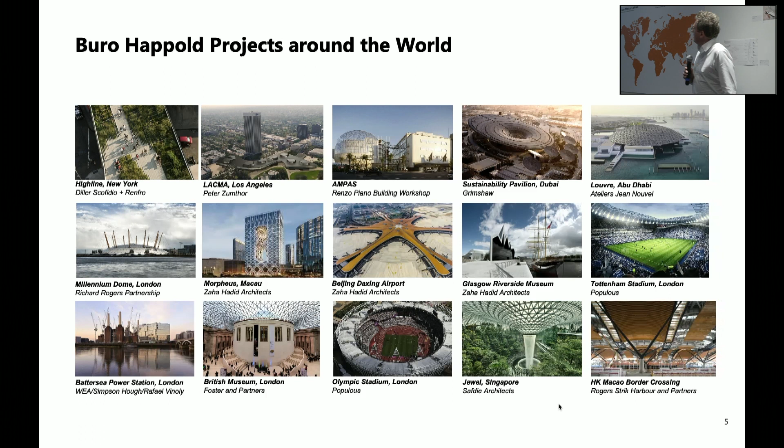The High Line, Beijing Airport, Olympic Stadium, Battersea Power Station, the British Museum, to name a few on that sheet. And some of them are mine. I've worked on those, and I had the great fortune to work with some of the best architects in the world, and on some of the most challenging projects, like lifting the Cutty Sark 3 meters in the air, and Beijing Airport, or this project there, Bee'ah headquarters. I just come from there. I saw the client there yesterday.

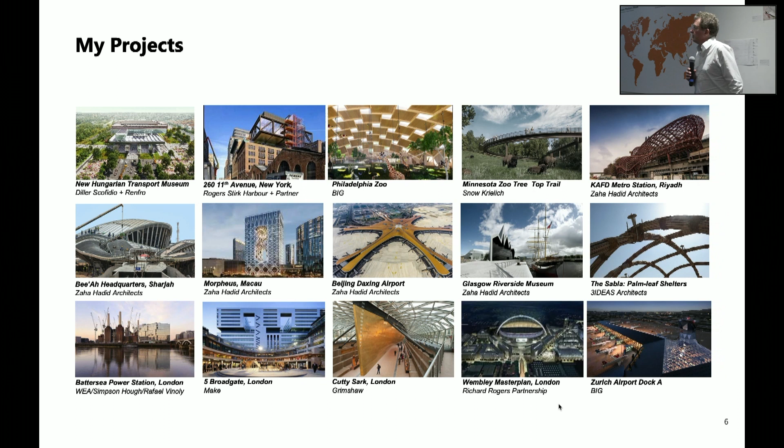And as a company, like we saw earlier in Brigitte's quite thought-provoking talk, there's been a movement over the past, say, 5 years that has brought all the sustainability questions much more to the fore. For us, they've been driving questions for the past 40 or almost 50 years of our existence. They've always been at the forefront of what we're doing. But this push for zero carbon, I would say, started around 2018, 19. Before that, nobody really wanted to know.

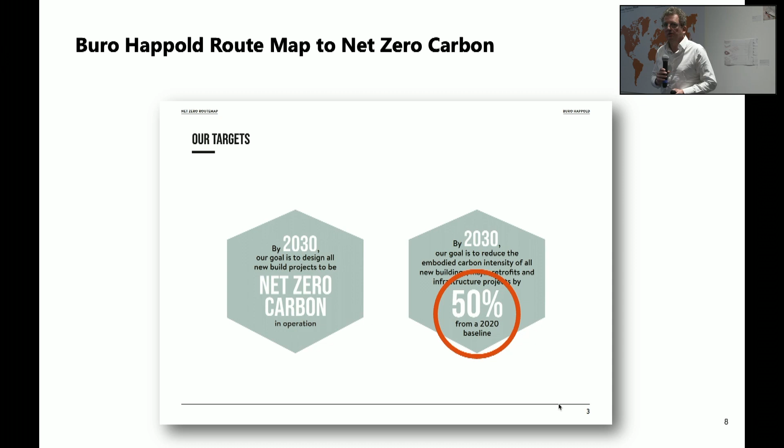And we've enshrined that into our own route map to zero carbon, our sustainability strategy. And here you will see something interesting, because while we are committing to net zero carbon in operation by 2030, we're committing to 50% reduction of embodied carbon, because materials are the problem. They're really the biggest problem.

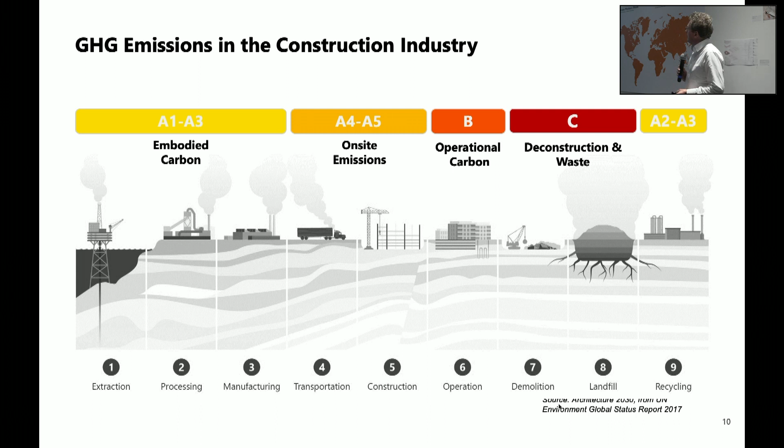Everything we do sits in this extract, build, throw away economy that Brigitte was talking about. And these are the points where we accumulate carbon, embodied carbon or carbon in general, in the construction industry. And we heard the percentages, they vary. I'm a little bit more on the timid side. I say it's 39%, not 41%, but 40% is the number of the contribution

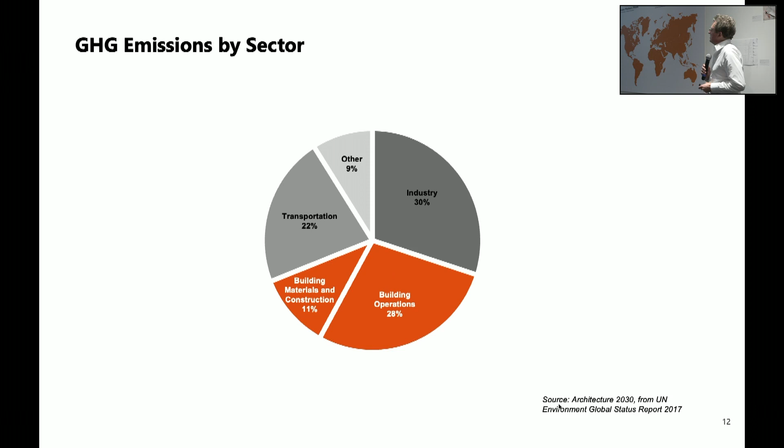of what we as architects and engineers are directly involved with to greenhouse gas, or GHG, emissions. They're measured in CO2 equivalent, but there are other greenhouse gases that play a role in that. So the industry had started talking about greenhouse gas emissions. But if I split this further, this is the real culprit here. Building materials and construction itself is 11% of the total, more than a quarter of our contribution in general.

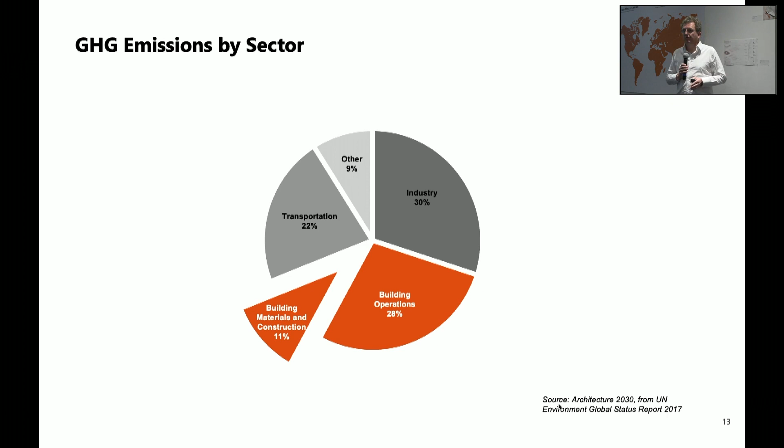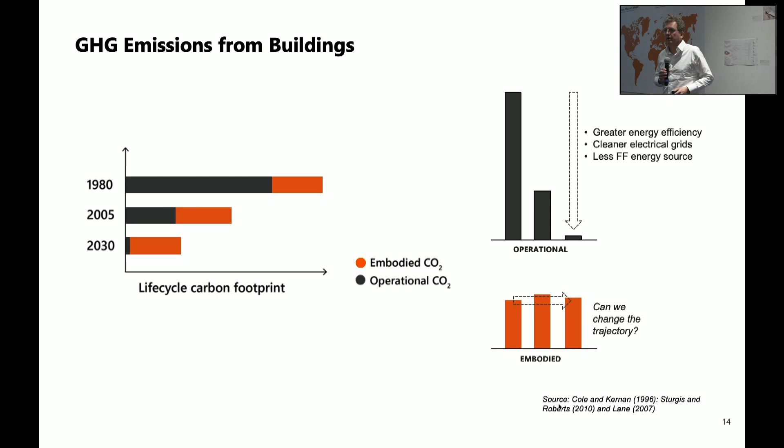Cement and concrete. Here's an interesting one, because cement is the real culprit. I'll come to that in a moment. A kilogram of cement is a kilogram of carbon. If you then mix it into concrete, it becomes a lot less, because concrete is a mix of materials.

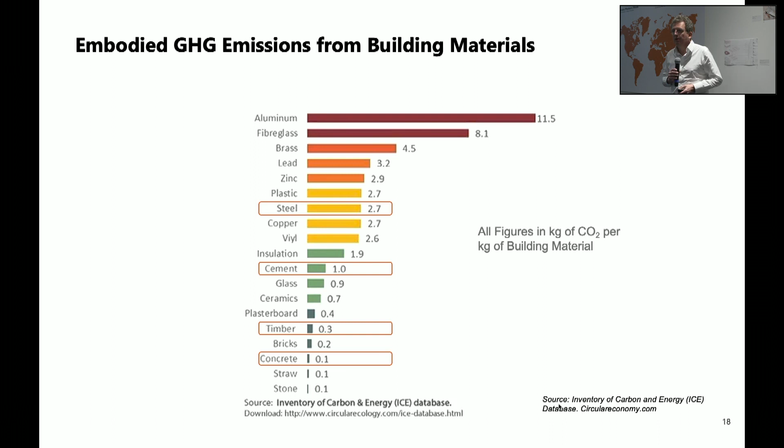And then the third one I want to look at is timber. And timber is often sold as carbon positive or negative. I don't even know which way around you want to look at it. Basically, it's got no carbon footprint, actually good for the environment if you build in timber. I don't quite believe it, and I'll show you why.

I'll bore you a little bit with chemistry, because that's where it all starts. Cement and concrete. Concrete is a mix of cement, water, aggregate, all mixed together, and that then becomes something that hardens because of a chemical process. But in order to get there, you take limestone and clay, you fire it up to 1400 degrees, and you blast the CO2 out of the limestone.

So you cannot make CO2 emissions-free concrete by simply heating it with something magic and renewable that would heat it up to 1400 degrees. That is the other problem. No renewable energy actually at the moment is able to bring you up to these kind of levels of heat. Any kind of electrical heating coil would just melt at that point. So you have to blast hot air into this thing, and out comes CO2. That's the biggest problem here.

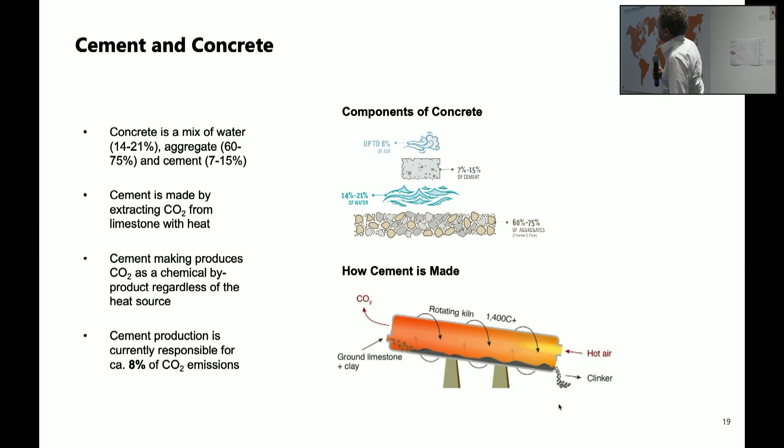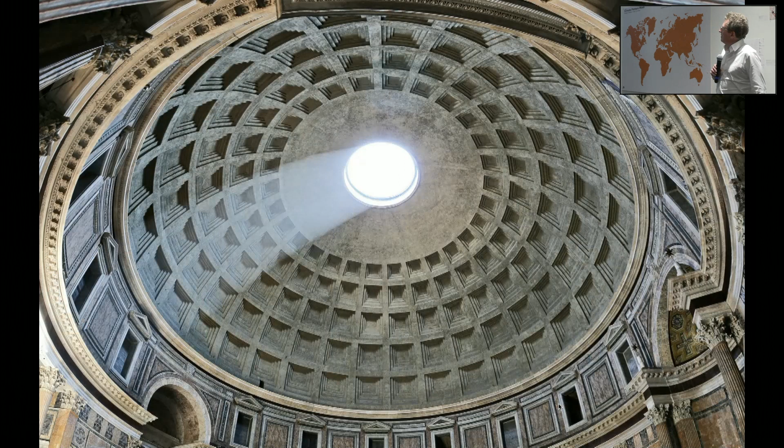And if you add it all up, concrete is responsible for about 8% of global carbon emissions. That's more than twice aviation, similar to only one other material. I'll get to that. But concrete's been the sort of wonder material, right? It starts way back in Roman times. The dome above the Pantheon is actually made from a concrete, a cement-type material. And it sort of got us hooked, basically, because we can do things that are beyond anything, right?

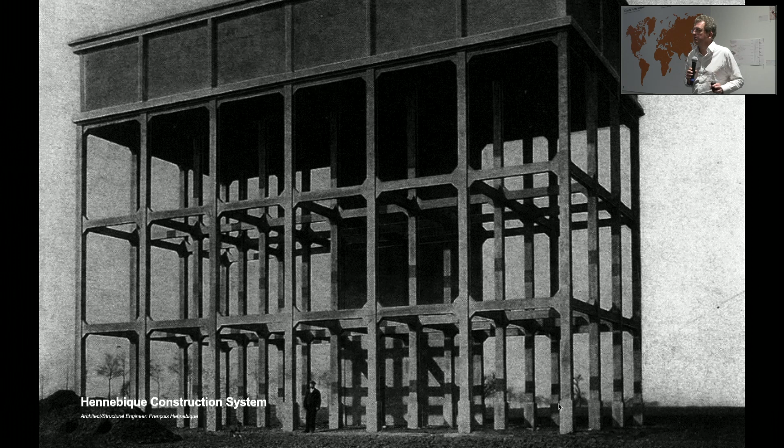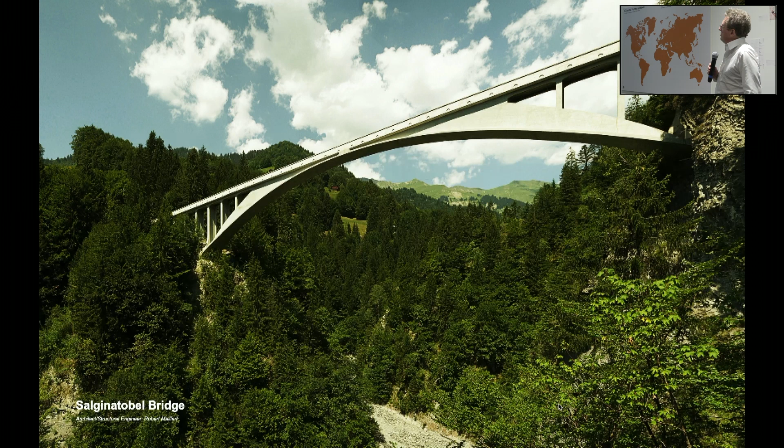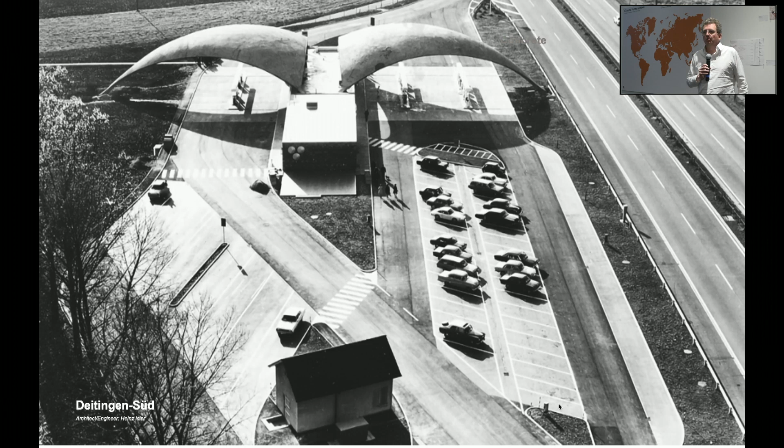Hennebique's structural systems from the 1880s then started turning concrete into a structural material, initially sort of tectonically, maybe a little bit like your standard metal or timber structure, but it's really these kind of long span structures, Maillart's Salginatobel Bridge, or the shells that Heinz Isler built that make concrete into this sort of wonder material, a material that can be formed, that can be an architect's dream, basically. It doesn't always move. Or this one.

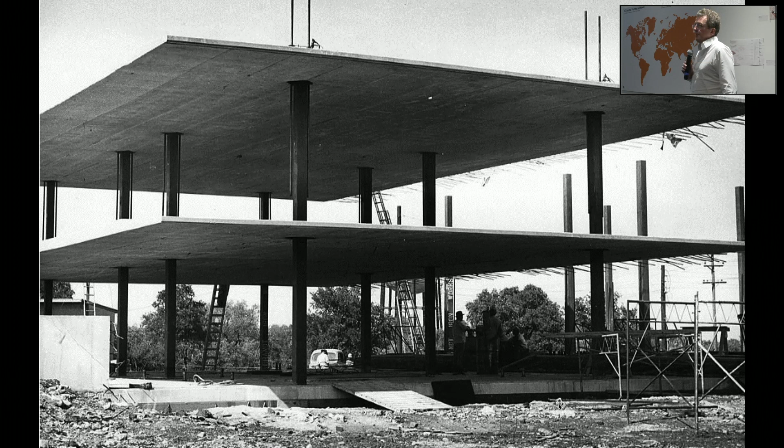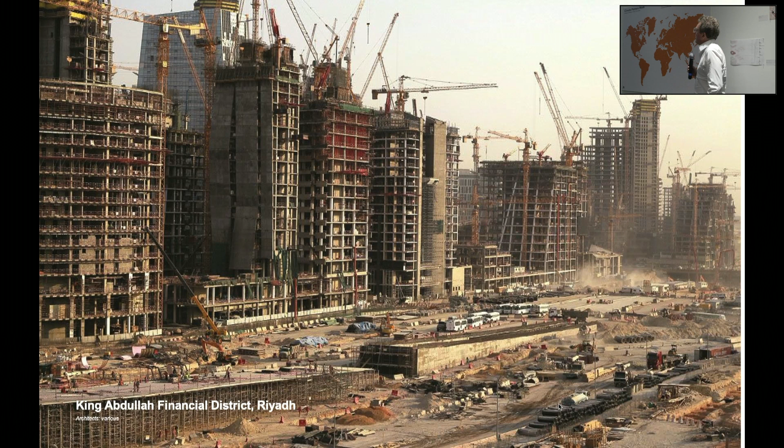But ultimately, what makes concrete so versatile is that you can build what you see here on this rather weird picture, but it shows so nicely the flat slab, right? You can just stack floors, and that's what it looks like in the end. We blast this out. This is KAFD in Riyadh, the King Abdullah Financial District. Hundreds of towers built within the space of 5 years in an area where there was nothing. But concrete is cheap because it's made out of limestone. The whole of Saudi Arabia is limestone. All you need to do is fire it up and turn it into cement.

Similar story with iron and steel. In order to get iron made out of ferrous oxide, you have to blast the oxygen out of the ferrous oxide. And that's a chemical process, and the best way to do that is with carbon monoxide. So you take carbon monoxide, you blast it through a blast furnace, and out comes CO2, and the bottom drops out raw iron. That then needs to be turned into steel. That's another process that uses huge amounts of heat.

And in the end, that part of the industry is an equal 8% of total carbon emissions. So an equal offender to cement, slightly easier to go about the reduction of iron and make that out of hydrogen, only that we don't have hydrogen at this moment in time that is fully made out of renewable sources. If you then take the hydrogen that's split out of the methane, then you're actually worse off than doing it with coke. And I'm sorry, this is where the chemistry lesson ends.

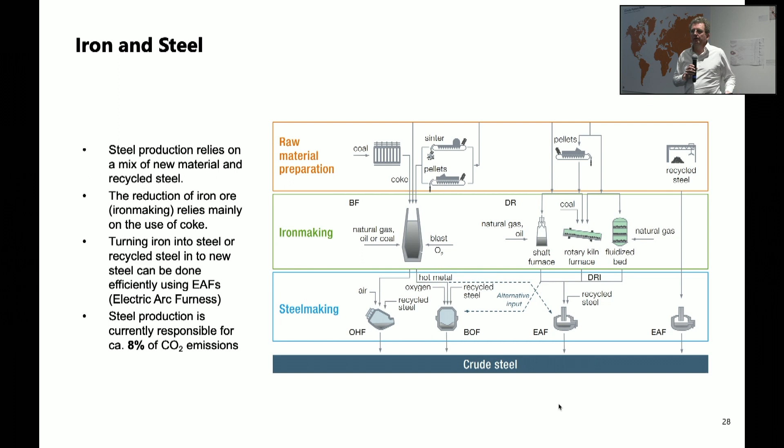But I think we need to go through this because I hear it ever so often that if we just made concrete or cement with renewable energy, then the problem would go away. No, it doesn't.

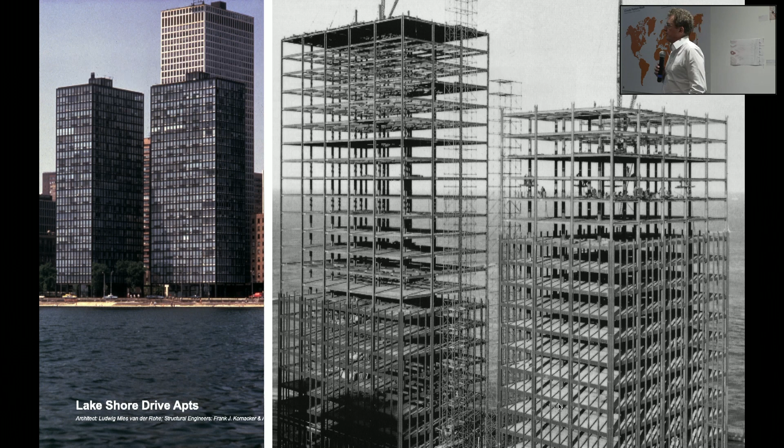Or then later, again, the desire to stack floors. This is probably environmentally the worst building in the world and still one of my favorites. Lake Shore Drive Apartments, Mies van der Rohe in Chicago. Apparently it freezes in winter and you boil in summer. So all singly glazed, but anyway, different story.

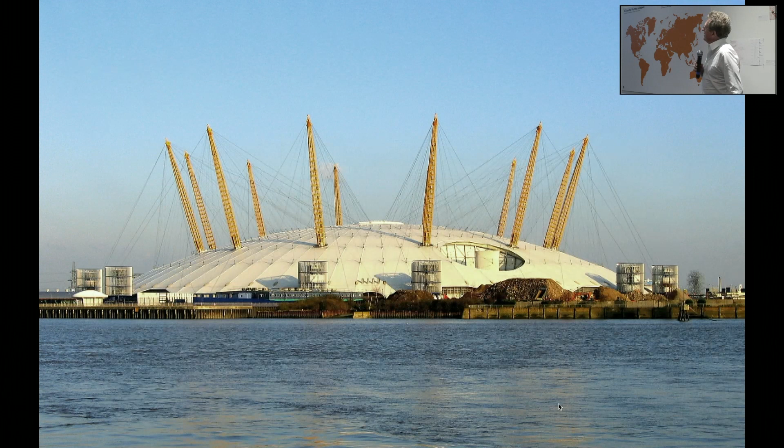But we could then drive this material again to completely new typologies. The Millennium Dome structure that we built in 2000 kind of shows that. Strangely, the air it contains is heavier than the material it has, but it's still a lot of steel, and without steel it wouldn't be possible.

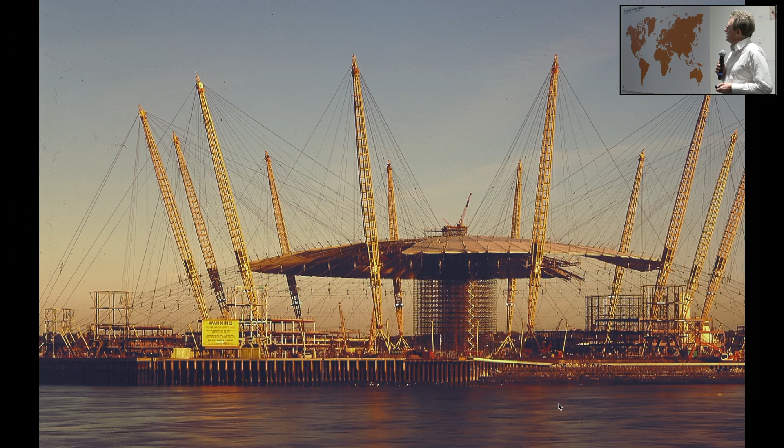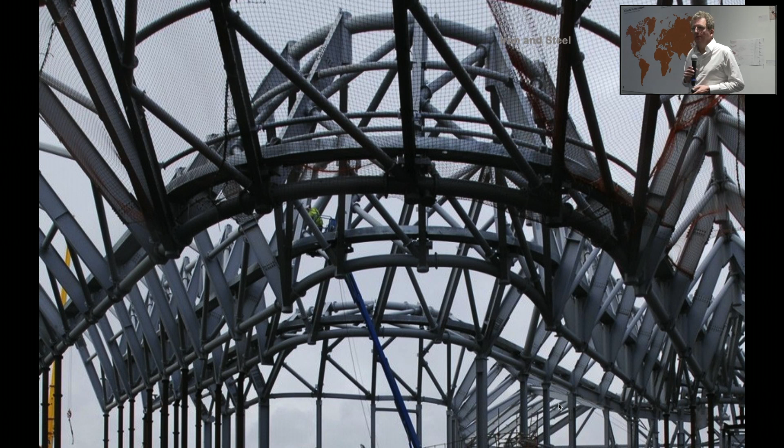This one here, slightly different approach, one of mine, the Glasgow Riverside Museum. I think we used quite a bit of steel in order to achieve that shape and cheat gravity and show that engineering can support a very capricious architecture, if I may put it this way. I've worked many years with Zaha, and it was always a real challenge and real fun. But if I think about it in retrospect, it comes at a bit of a cost, possibly.

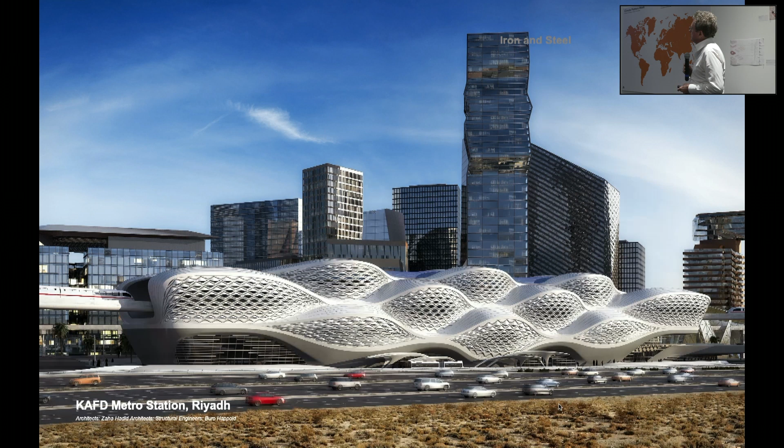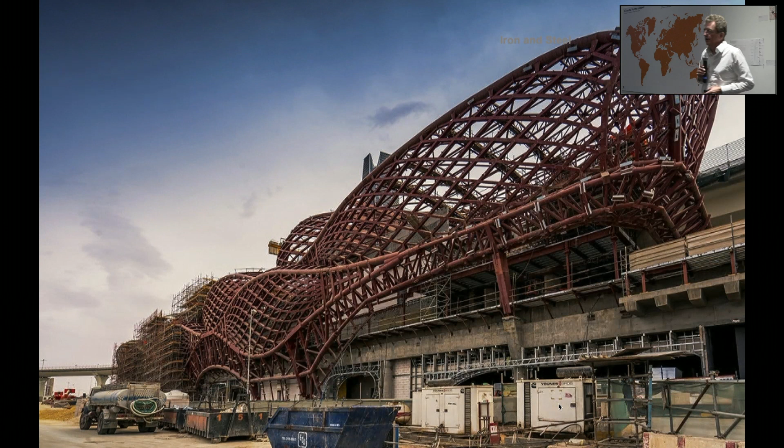This is probably the most extreme of them all. Again, a Zaha project, you may have seen this, it's just about getting ready. This is the metro station for all these towers that I showed you earlier. And that thing on the outside that looks as if it's made out of concrete, it isn't actually concrete. It's just clad in concrete. It's steel, and a lot of it.

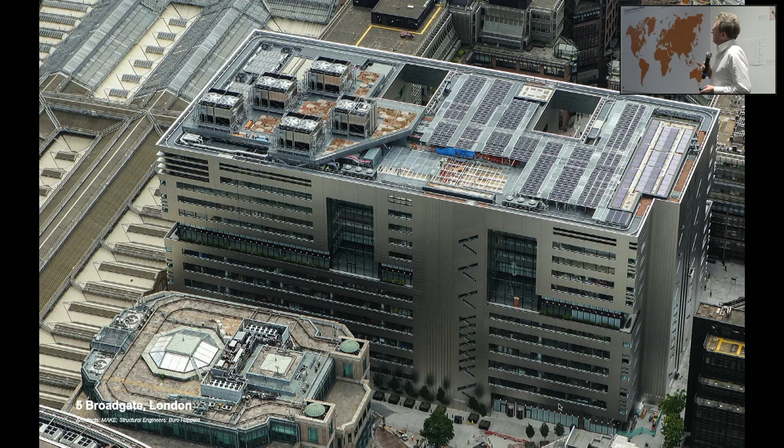So steel is incredibly versatile for a structural engineer to do whatever with it. It's a beautiful material in that sense, but this is sort of peak steel sculpture, I would say. And again, it comes back to actually just stacking floors, as I said. This is a project that I did years ago in the City. Massive banking facility. Just floors one on top of each other.

And the reason why I show you that is because at the time, in 2012, we did a life cycle carbon assessment and used our engineering to take some carbon out, reduce it in some areas. But you see that number up there, 88,000 tons of carbon in this building, which equates to roughly 840 kilograms per square meter. That's a lot.

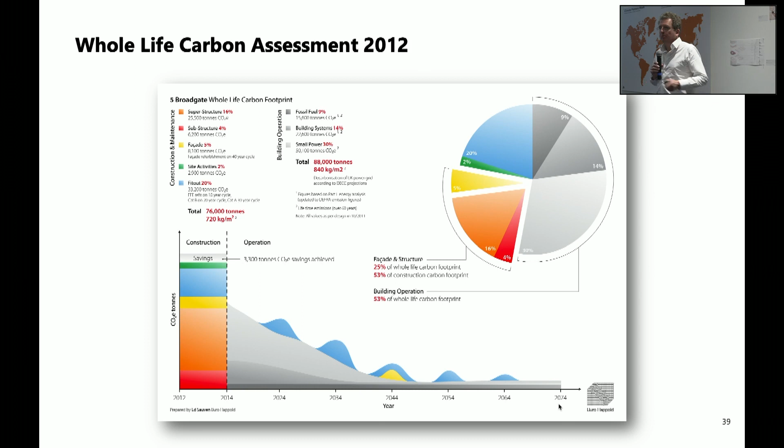Interesting also, when we did this, British Land paid us to do this study. And after the project was over, I went to the sustainability director at British Land and told her that we should do this on all buildings. And she said, no, this was a one-off, no one's really interested in embodied carbon. That was in 2012, right? She's no longer at British Land, and she will probably eat her hat or something. But it has become something incredibly important. We do these life cycle assessments now on every building.

The third material I wanted to look into is timber. And I told you, timber isn't that sort of wonder material that we are made to believe it is, because it actually starts off as trees, but then it goes through a massive industrial process from kiln drying to glue laminating to transport and all the rest of it. It is an engineered product. It is not necessarily a natural product anymore when it comes to our construction site.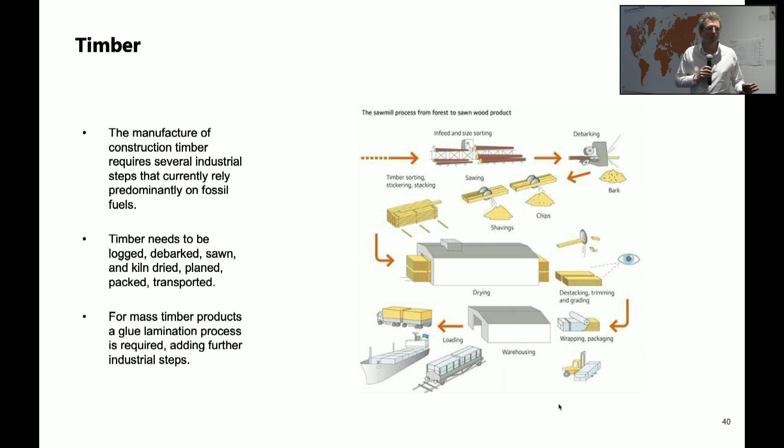So there is processing, an embodied carbon in that whole way of how we deal with it, and a lot of chemicals involved in that. I'm not saying it's a bad material, but it isn't carbon zero. We try to get as close as possible to carbon zero. We've used that a few times in examples, Mike, right?

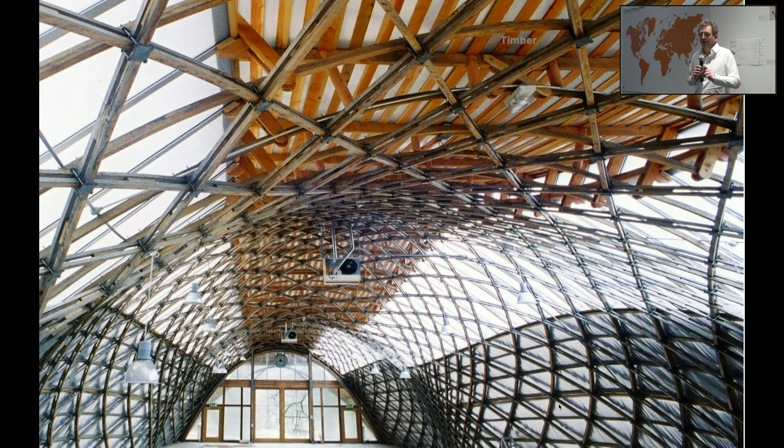And I went to Stuttgart, to Achim's AAG conference. I gave a keynote there, and the three people before me were doing timber grid shells. Would you believe it? I said, look, guys, go back to the 1980s and 90s. We've done them excessively.

This is as close as you can get to natural material timber, because it is green timber. It is not glue laminated. It's just cut slats. It's not kiln dried, deliberately not, because you actually use it in its bendable form. You bend it into shape and make it into the form it then dries into, in fact.

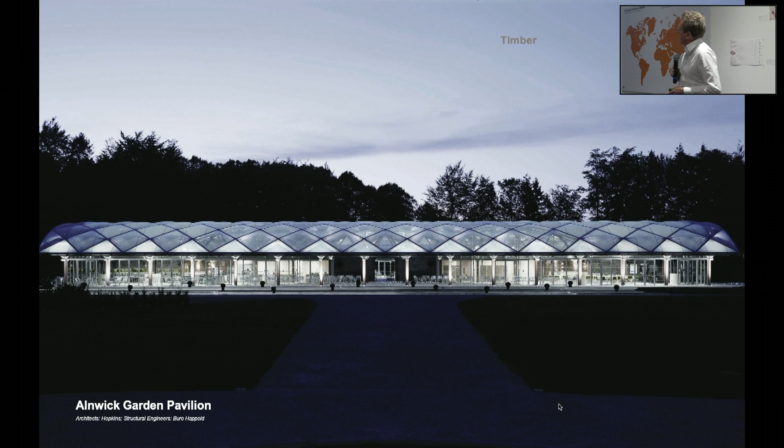But most often, another one of our projects, rather beautiful, but here you get it, the idea that timber is effectively an engineered material. We have metal connectors wherever we piece the individual parts together, and it becomes a hybrid of metal, glue laminated timber, very far away from the natural product.

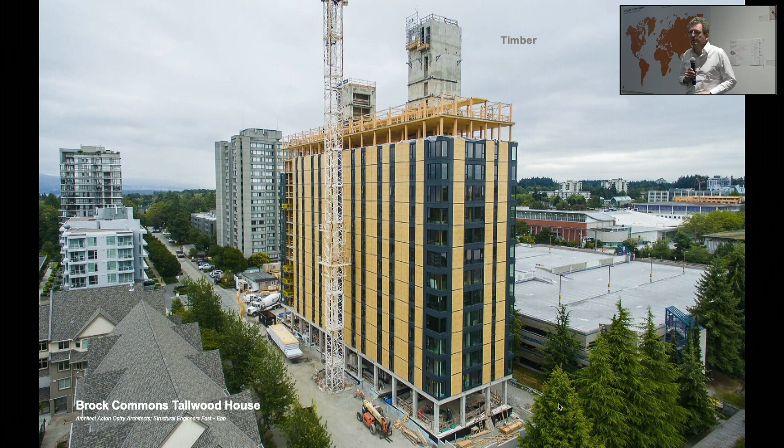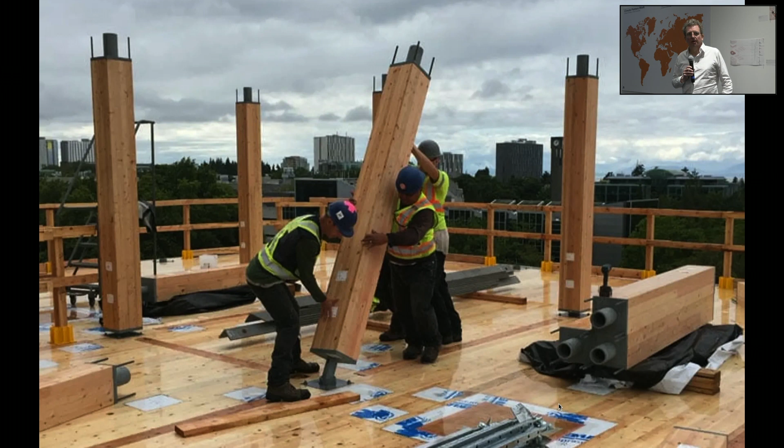Here too, there's this push now to stack floors. This is one of the first tall buildings, pushed up by the engineers Fast + Epp, in British Columbia. You've probably seen that, right? Quite an interesting structure, really mimicking what we're doing with concrete, right? The flat slab and the single columns in between. Slightly tighter column grid than in your normal concrete structure, but quite spectacular, I would say.

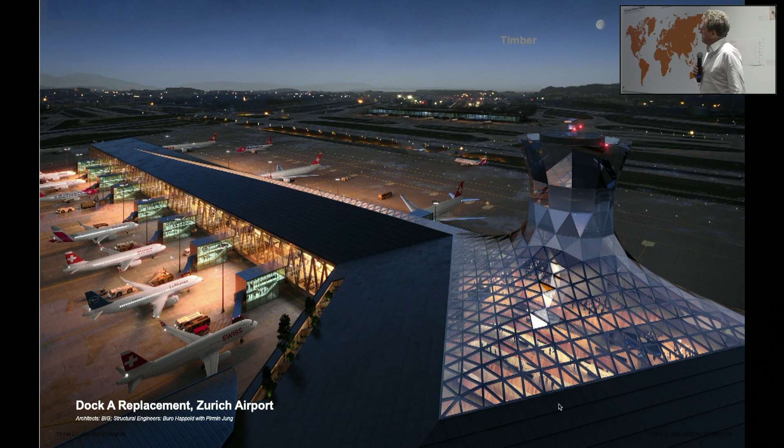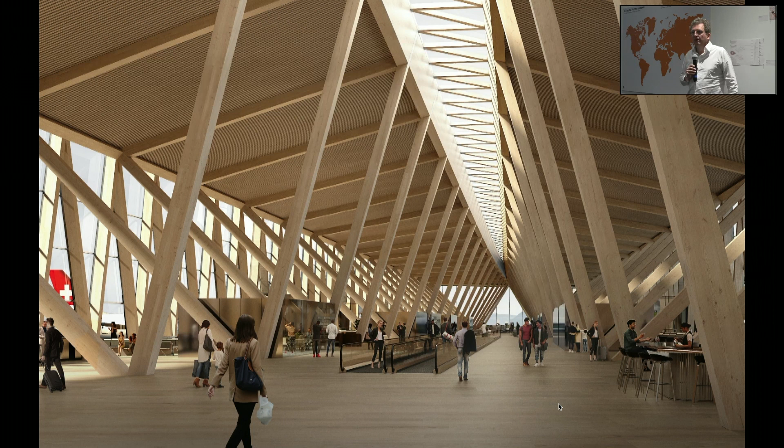And then this one here, again, is one of my projects. The competition that I won a couple of years ago is now in design. Dock A replacement, Zurich Airport, that's what it looks like on the inside. I think we're moving timber now towards the same thing as steel, try and push it as far as we can, and at the end, is it more sustainable? I don't know, because the question here will arise in a second.

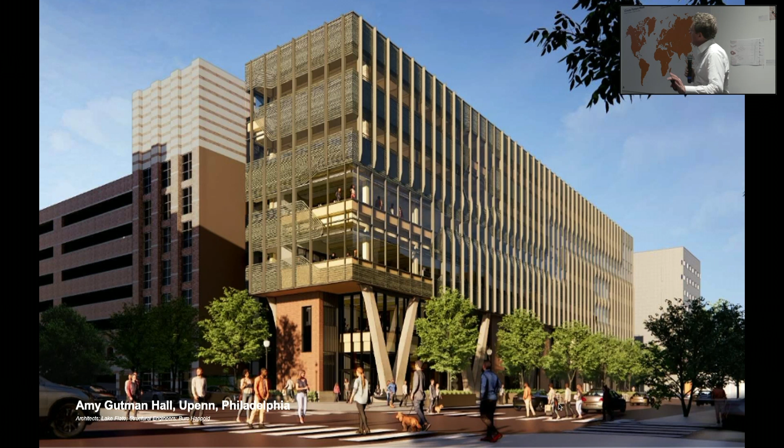Another building in America. Their timber is a little bit behind still, although everything is actually built on a single-story scale in timber. When it comes to multi-story, it isn't quite as advanced as in Europe, I'd say. And quite often when we did studies into where the timber should come from, it was actually cheaper to get it from Austria than from Minnesota to the East Coast, just purely because of how the industry is set up. On this building, we did quite intensive research into the various different floor options, and I bring this up so that you can have an idea of where it lands.

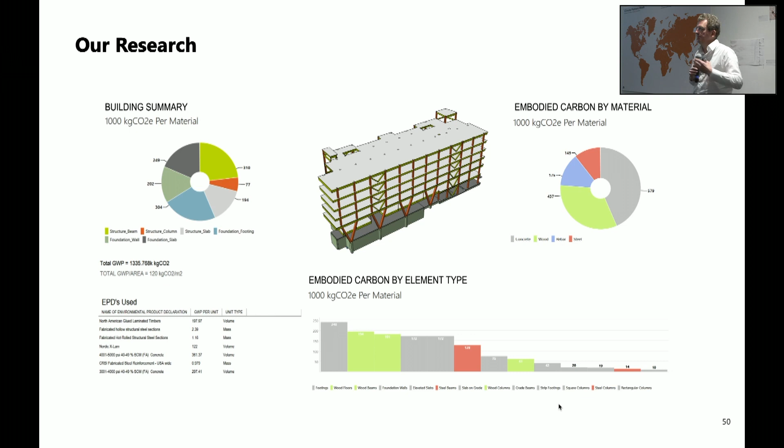And here too, the timber option, just the floor structure, gets you to 120 kilograms per square meter of floor. Far better than the concrete option at the other end of the spectrum, which is about double that. And the steel, with different types of, NWC is normal weight concrete and LWC is lightweight concrete, slightly different, sits somewhere in between.

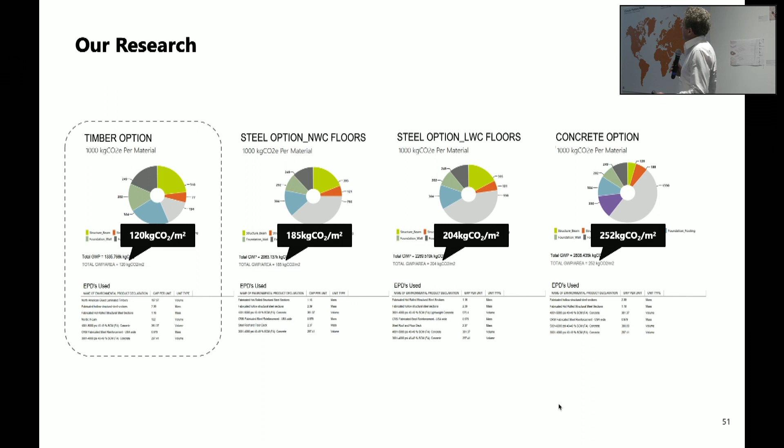Here was that sort of thing that I mentioned earlier, though. Is timber the answer? This is a study that we were part of, published in the IStructE magazine. I'm not going to go through this because it's a little complicated, but it was looking at this cycle of cutting timber, replanting it, cutting it again, replanting it. At the point where you take the tree out, it can't sequester any carbon anymore, so you take that out of the equation. You have to replant, and it takes time for that tree to get to the same level of sequestering as before,

about 50 years. And if we then couple this with the idea that the lifespan of a building, something that really irks me, we design buildings for 60 years. And then what? Either we do what Brigitte mentioned earlier, we turn them into a circular economy and reuse them, or do we throw them away? But if we throw them away, then actually we get to the point that the timber floor is worse than

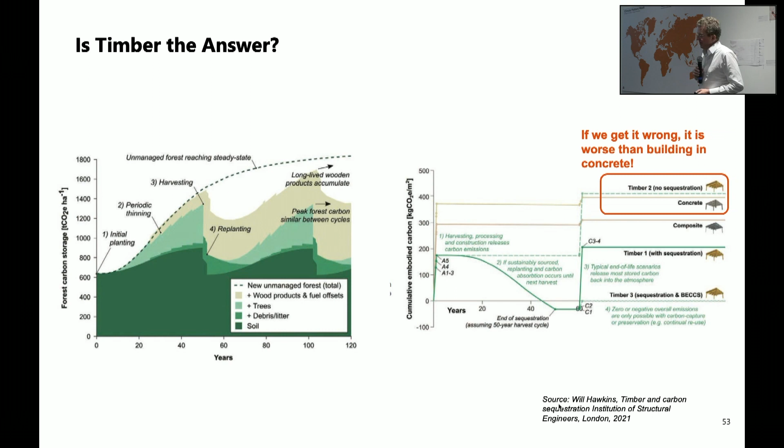concrete. It's really about what is the afterlife of that timber, because if we burn it, which is very often the only way to get rid of it, because it is full of glue and chemicals, then we're releasing the carbon back in the air, and we're as bad as before. So we really have to be very careful how we deal with timber as a renewable source of material. That's its huge potential. But it gets me to something quite important, we get to that in a second, about how we design and how we actually go about this sort of stuff.

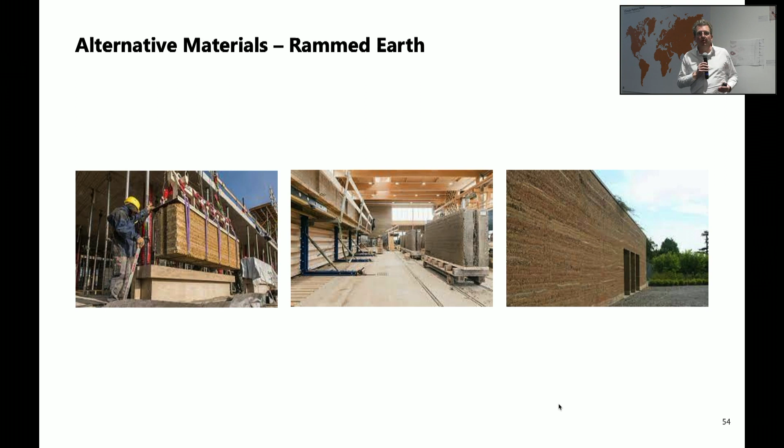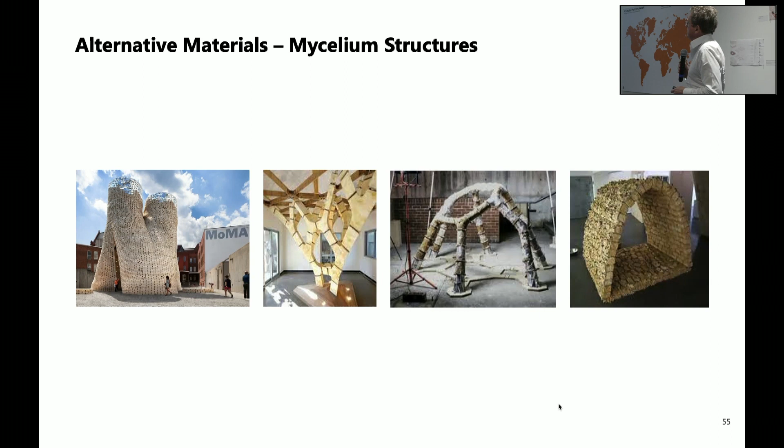I felt I needed to mention some alternative materials. They are up and coming. Rammed earth is something that's gaining a market share of 0.0001%, but with techniques that are scalable, actually usable, prefabricated and all the rest of it. Mycelium is one of those that pop up every so often. They never really go beyond pavilion scale. And when I have these kinds of studies with my students, I say to them, you can do anything you want, but no pavilions. Because pavilions get you around the real problem, stacking floors and being a little bit more ambitious with the scale. So I said it already, we need to rethink how we build.

And the whole industry, that's the good news part of it, has actually started to embrace that. This is the Green Building Council's roadmap to zero carbon. London has its own regulations. We heard that earlier. We need to now prove in London that there is a case for demolishing a building. If we want to demolish a building, you usually have to go to refurbishment or restructure.

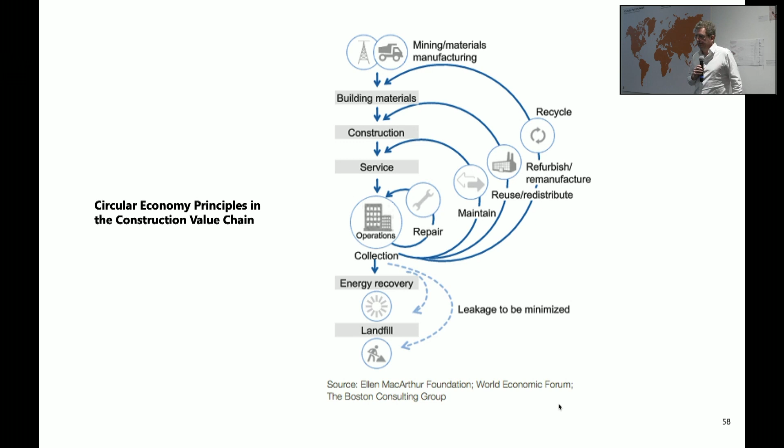And the Marks and Spencer piece, the building on Oxford Street, is one of those where this has made big waves. Yeah, it's become a political thing. And I think it is a good thing that it has, because it forces us to think in circular ways, and it forces us to think about what we do with these buildings. This is a study that I did for Sidewalk Labs in 2016. That was all about future adaptability, because I'm highly doubtful that that 60-year lifespan is a useful thing.

And if I go back to that Broadgate building that we did the embodied carbon study for, what we didn't put into that embodied carbon study is that there were two perfectly good buildings that were built only 30 years before, and we demolished them because the client wanted bigger floor spans. Yeah, absolutely ludicrous if you ask me. And I keep it very quiet that we actually won a sustainability prize for that building. Today, I don't think we would.

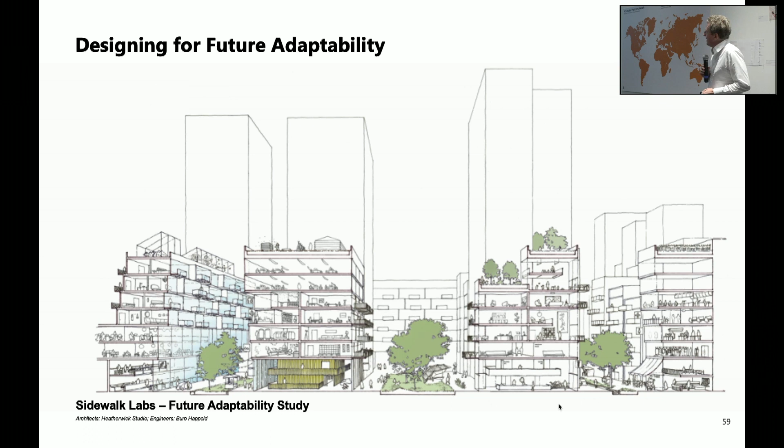But we did this study here for what needs to happen in order to make a building adaptable. And it was very easy to see that the quickest way to gain future adaptability is a loose fit, something that allows you to not lock yourself into too tight a floor plan or too tight a floor-to-ceiling height. If I go back to this, the 3-meter floor-to-floor height for a residential building, you will never be able to turn this into an office building or a hotel or anything other than residential.

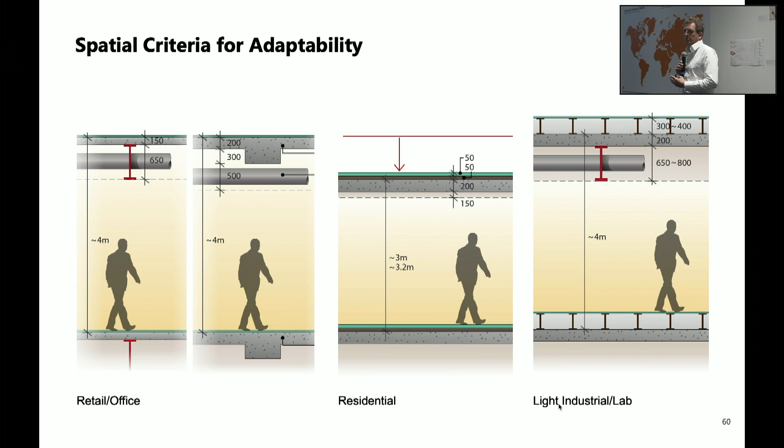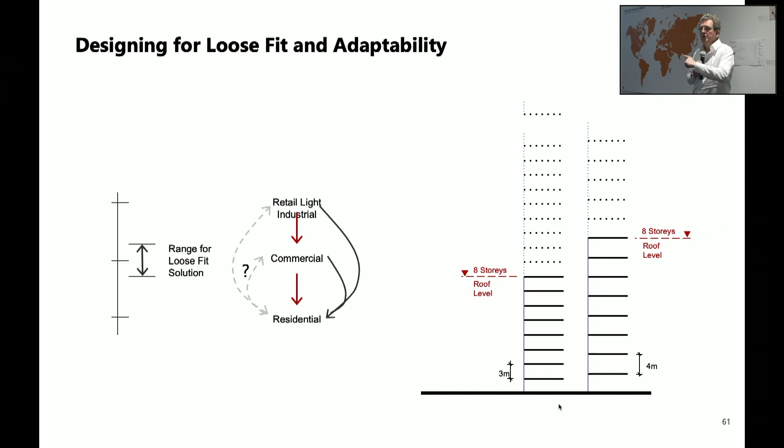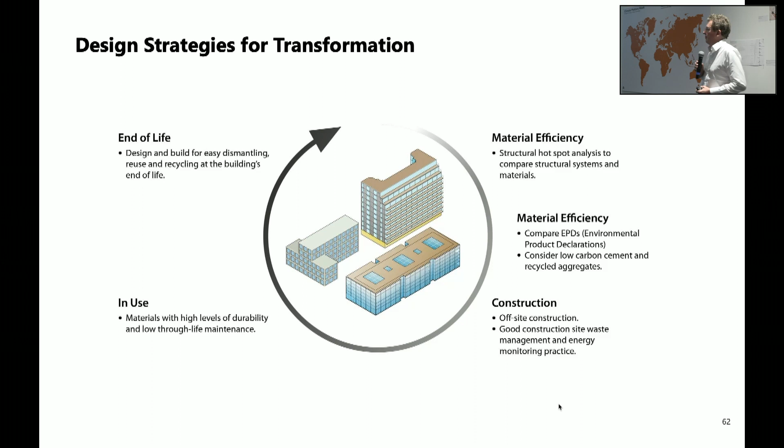Terribly limiting. So it's worth, we did a study at the time, spending a little bit more carbon at the beginning to achieve that loose fit, but it needs to be coupled with circular thinking, that we build this building for reuse, that it becomes a building that has a lifespan that is way more than the 60 years that we look at, or the 30 years that we accept far too often.

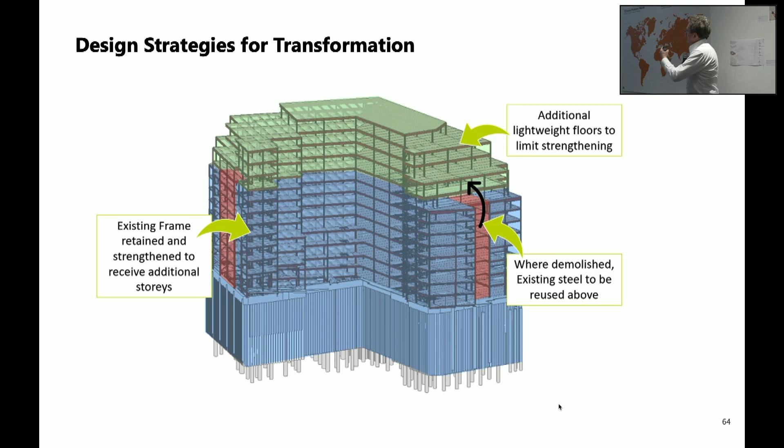And I just bring this one up. It's probably not the sexiest building on the planet, but it follows exactly what we're postulating. It's for a big bank in the city, and all we did here is look at what we can do with the existing building. They needed more space, and we did a study of what can be done with the frame, and the whole concept is to build on it as light as possible so that the foundations and the existing structure can take it. Don't take down what you have, and reuse the frame. And that's actually quite interesting.

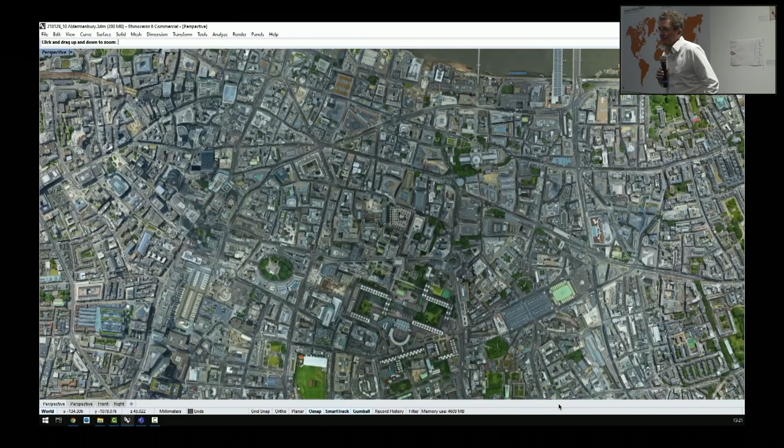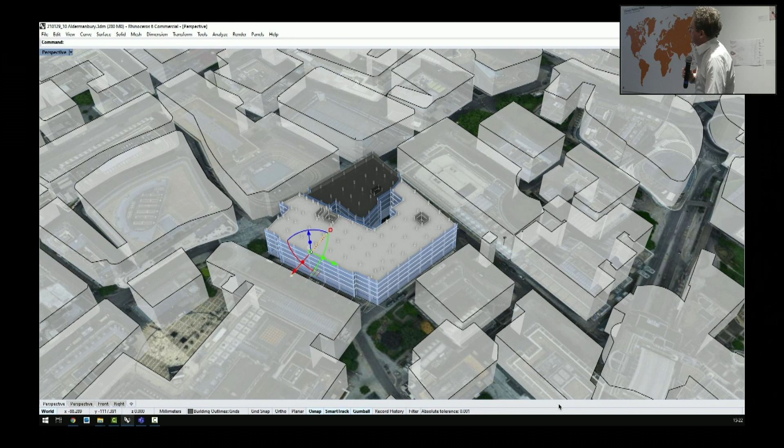I'm not going to talk much about technology today. I hope this works with a click here. But we're using all our technology stack in the background to facilitate these kinds of ideas, so that we can very quickly get to an assessment of what a building can take and what we can do with it. That's the future in London at the moment. This is where it's going, and the discussion, which I have with many of my partners, is all about: should we build new at all?

It's a shitload of carbon, 500 kilograms. We haven't made a dent in the problem. And we haven't achieved with that what we said we would, that we get to half. So we have a real problem. And that real problem, I think, to a large degree has to be solved at the chemical end, at the material science end. And that's where we plug into that as engineers. And I think you as architects going forward need to be aware of that and need to be plugged into this conversation as well, because there is a lot happening.

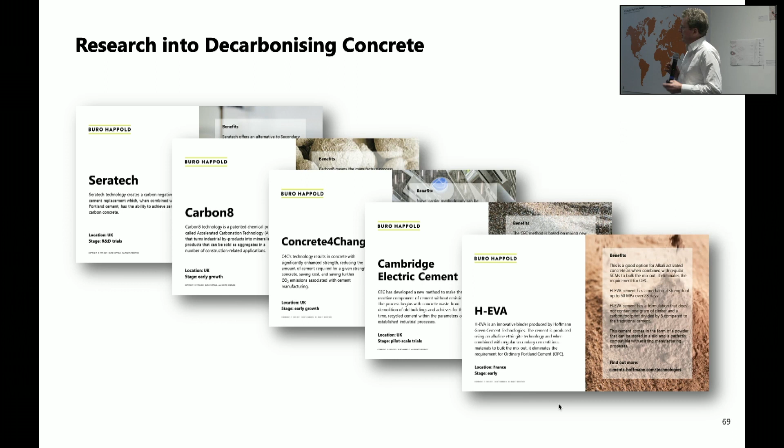We put a list together of those who we believe are worth pushing. There are 5 or 6 individual startup type laboratory organizations that are doing decarbonized concrete in various different ways. I think some are more promising than others, but at least there is quite a lot of individual push out there that move in the right direction.

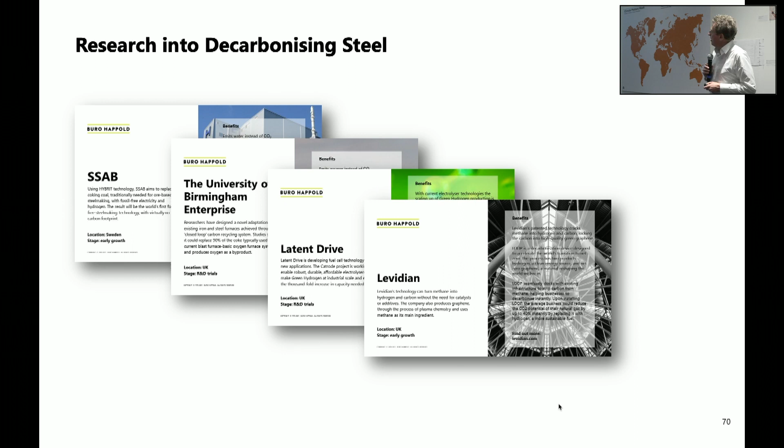And the same is happening with steel. That sort of University of Birmingham enterprise thing that you see there is probably the most promising. It has a sort of carbon recycling thing that allows you to produce steel and concrete in a very efficient way with virtually zero carbon and no green hydrogen. Is very interesting.

And the really bad news is that all the big cement manufacturers, they're sort of banking on future technology. They're banking on it all happening with carbon capture and storage. No one knows how that works. Really? Yeah, we're going to pump it into the old natural gas holes in the North Sea. No one has proven how we get the carbon out of the air without huge amounts of energy spent, but everything is stacked on that.

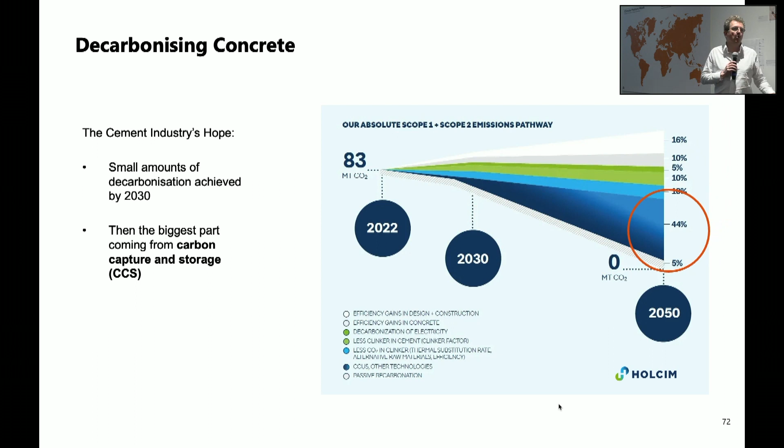45%, 44% of the reductions, of the total reductions, are achieved with that, and the full potential only in 2050. We need to decarbonize now if we want to get anywhere near it.

And then there's another problem. And that problem is, although world population growth is slowing, and by the end of the century it's virtually zero, by the time when we've set our targets, we have to house another 2 billion people. Now, if you think that London is 10 million people, roughly, for round numbers, that means you need to have multiple Londons, hundreds of them, in order to house these people. That's not going to happen so easily.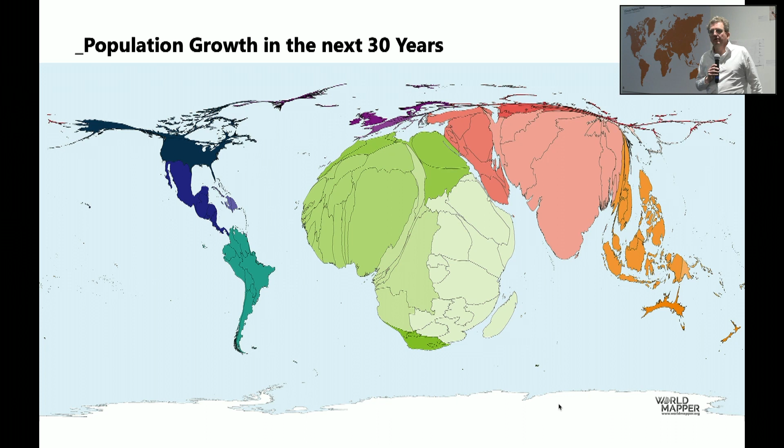And if you look at where this is going to happen, population growth in the next 30 years, by weight, yeah, I like these bloated maps, because they show you where it's going to happen. It's going to be India and Africa, Pakistan and Indonesia. I've got this here on a map from 2016 to 2050. Goes a little further back, but I don't think the 2016 numbers are too far out from now.

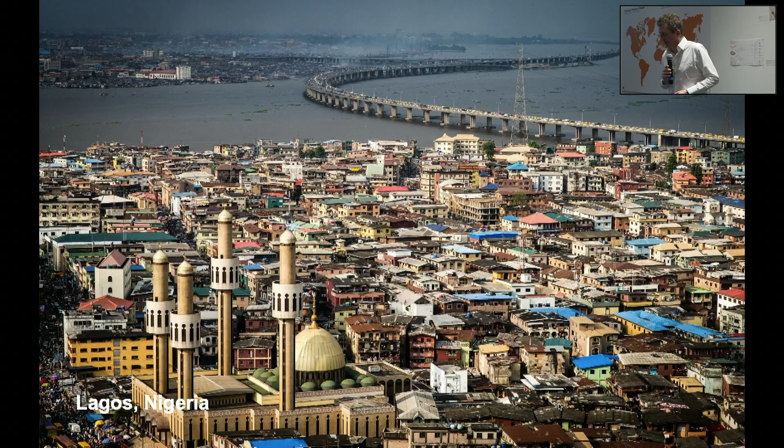But it gives you a flavor, that India is going to be the most populous country in the world, 1.7 billion people. Nigeria, that's the most interesting one, doubling in size, 200 million more people, boom, in the next 50 years, right? Not 50 years, 30 years. And if I go to Lagos, and its density, and what it looks like at the moment, I don't think we're going to solve it there with intelligent refurbishment. So we have to new build if we want to do this.

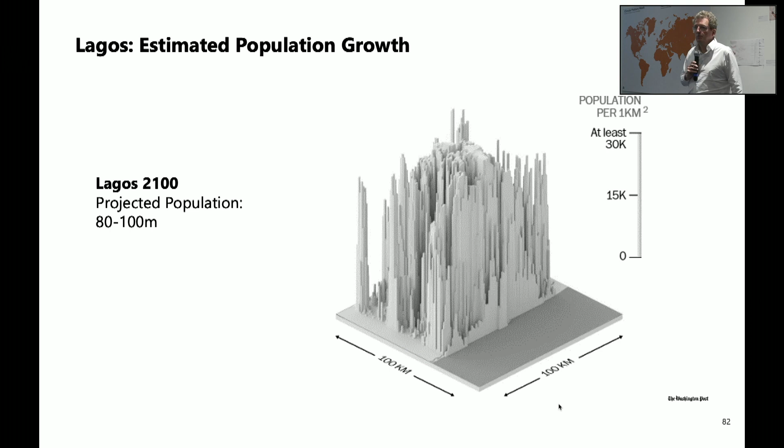This is a study that I found in the Washington Post, Lagos 2015, estimated population, because nobody knows, right? Nobody knows how many people live in Lagos, but estimated population, 15 million, that's the density plot over the city area. Project that to 2100, and it'll be 80 to 100 million people with that kind of density. This is going to be enormous building work that will happen there.

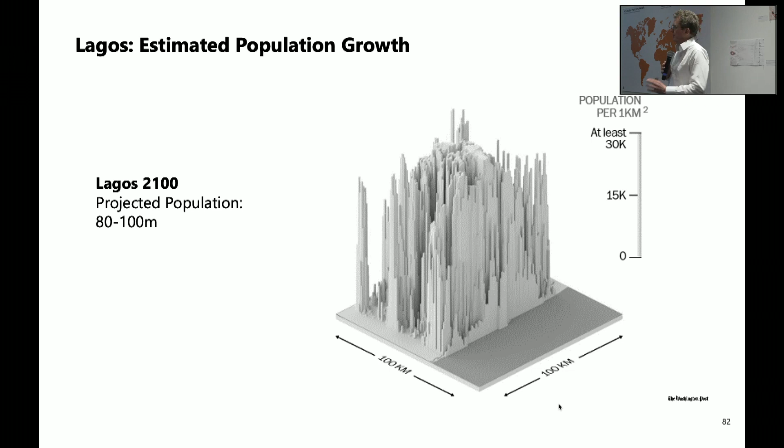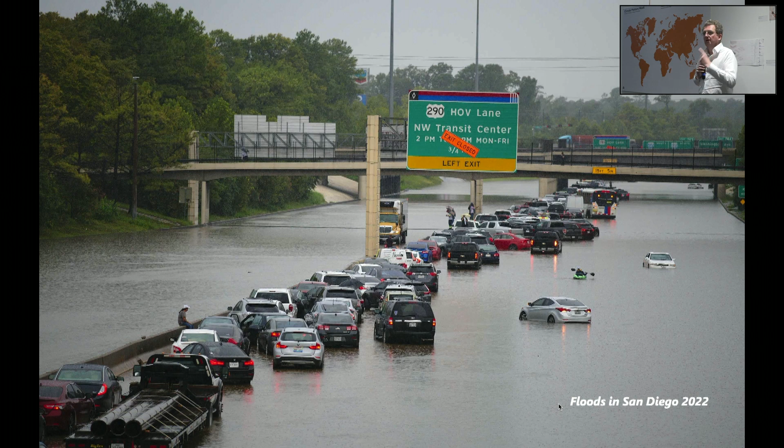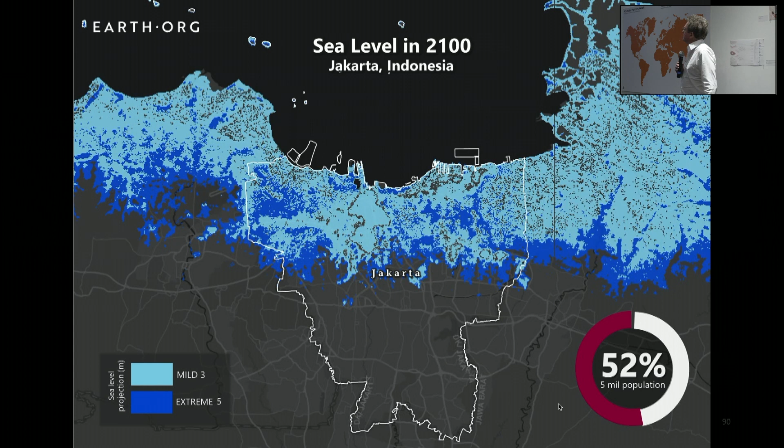Yeah, we're gone. And we're needing to look at this, flooding in California and typhoons and hurricanes all over the world, increased heat waves and droughts, and wildfires everywhere. And they're not exactly good for carbon emissions, right? Because we can save as many trees as we want, and then we have these kind of events all the time. And then the interesting thing is that most of our population lives in coastal areas, all around the edge of the landmass. And these kind of maps, they're not going to just happen in Jakarta and in Bangkok, where you think it's far away. It doesn't really matter to us here in Blighty, yeah?

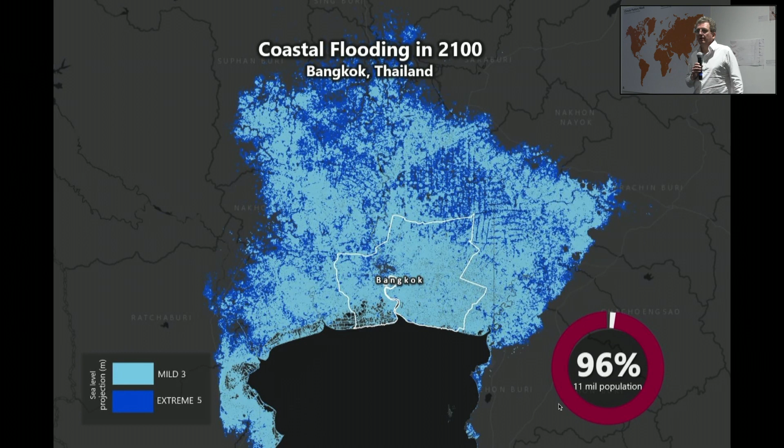But London is also going to be affected. And so is New York. And the question that I'm asking myself is, what does that mean for us, for architects, for engineers, for everyone in the room here? Because this is our future. I'm probably just going to be scratching the tail end of it, I'm too old. But it's your future. And in a way, it's challenging and it's brutal, but I think it's also an enormous opportunity to reinvent architecture and reinvent how we build there and what we build.

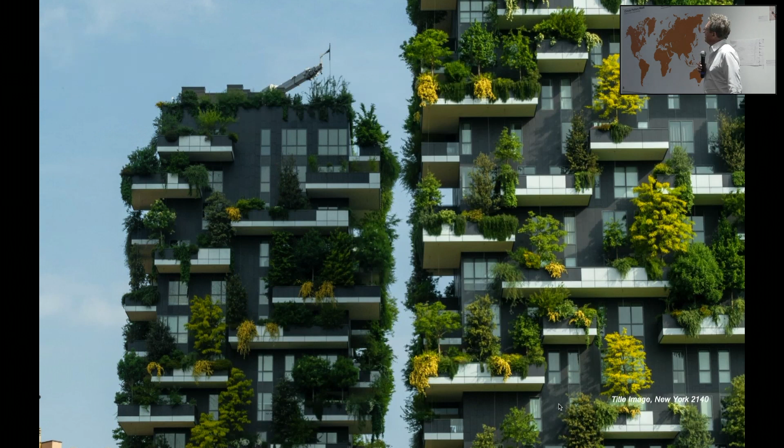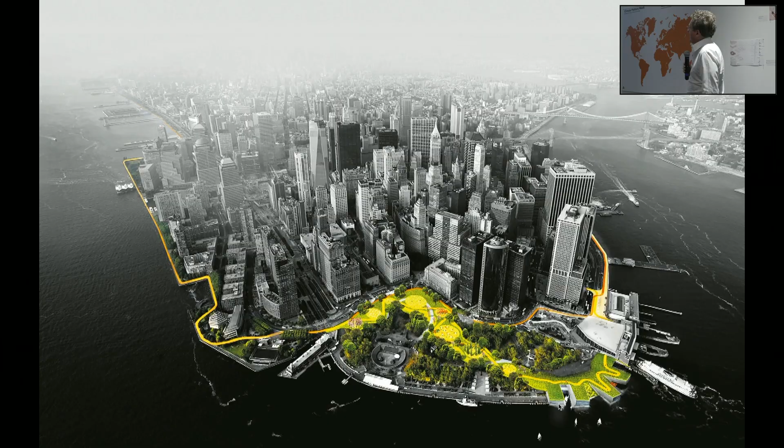They're making gestures about rowing out between buildings. Questions? Anyone? They're all smiling. Are you smiling, or are you gonna go slash your wrist?

Yeah. I don't know. I had a talk once in our office by Hugh Montgomery. He's a professor of intensive care medicine up here at UCL, and he started the whole thing with a joke. He said, one planet meets the other and says, how are you doing? Oh, I'm fine. How are you? Not so well. What's wrong? I think I've got Homo sapiens. And the other planet said, oh, that hurts. But don't worry, it doesn't last long.

Any questions? Hi, is it working? No. Thank you for an amazing presentation.